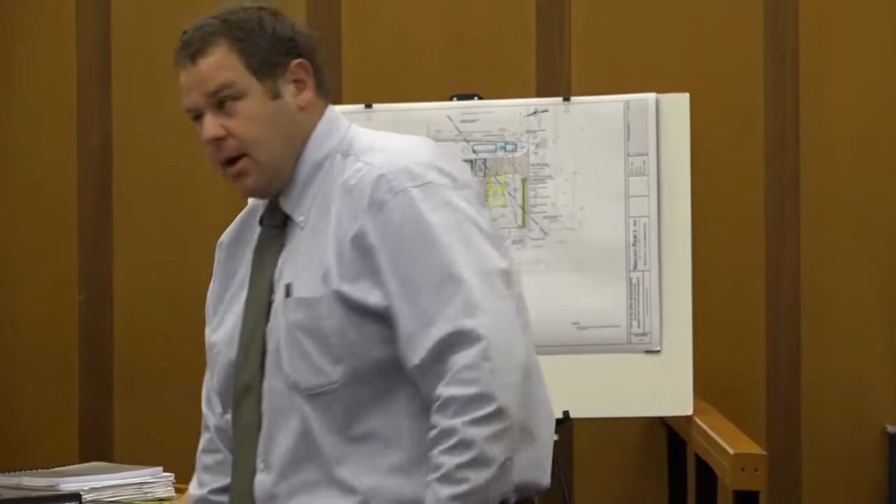That's over here on the board. If you'll see, currently we have where these black spots are - this is the above ground, this is the below ground pit. These were constructed in the 1960s, well overdue for replacement. We'll be moving forward with replacement of this station.

We'll be doing a 14 by 32 above ground building that will house our generator, all of our electrical controls for the new pump station, as well as a bathroom as required by code. We'll also have a large underground wet well pit that will house our grinder pumps, a shallower valve vault which will be used for our check valves, and then a smaller metering pit.

So this station takes a fair majority of the south end of the city, the whole Wood Street area next to the cemetery, and then it all feeds down into this area, including the complex.

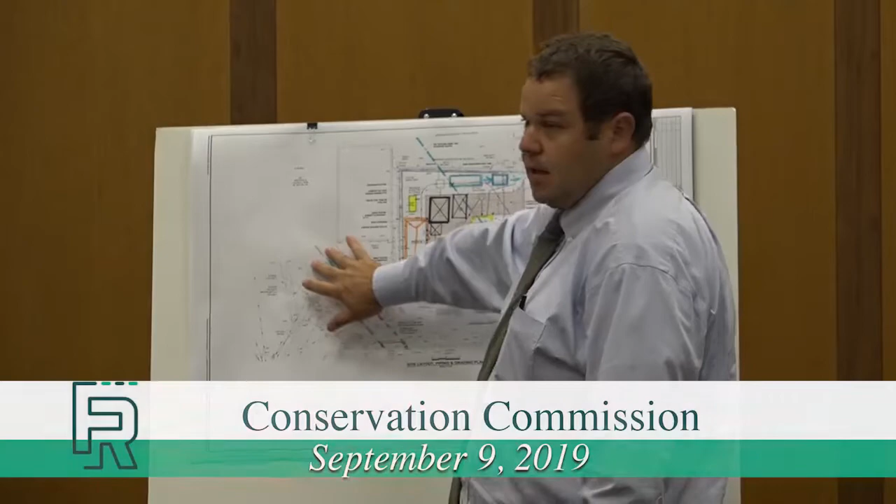Where we run into a problem, and why we're in front of the Conservation Commission - right over here we have Sucker Brook. Sucker Brook feeds from Stafford Pond into the South Watuppa Pond. We're within the riverfront and the bank of Sucker Brook. Our property doesn't directly abut Sucker Brook where the pump station is, but it is within the buffer zone.

Just as a layout, this will be the area of the new building that's going in place. This will be the wet well area. This is the valve vault.

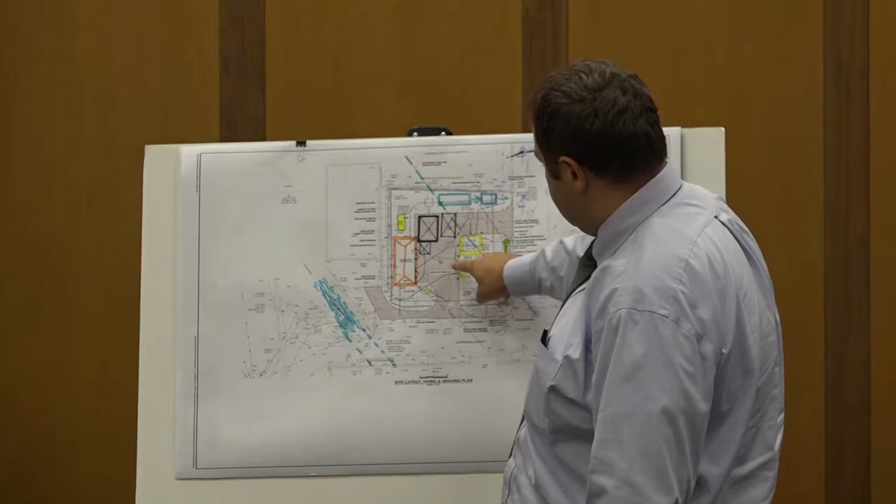The sewer currently comes in down this area and goes into the well here. It'll be diverted into this new wet well. We have a force main that comes out of the pump station and goes and ties in up next to Jefferson Street after it passes over Route 24.

Through the whole project, we'll have standard erosion control in place for any erosion from our site, and any dewatering, which it is expected that we'll have to do on the site. Ledge is 12 to 15 feet below grade based on the borings we've done on site so far, so we'll have to dewater to get down to that point.

What dewater means: once we dig a hole, if we just left that hole, it would fill up with water. We have to put pumps in there to be able to pump it out.

Through the project, we're putting in the bid that the contractor will have a frac tank on site. That's a large tank that allows any of the heavier solids or rocks that get pumped out to settle, then into a stilling basin and filter before it is discharged onto the street, heading towards South Watuppa Pond, through a water quality swale constructed by the water department two years ago, and then into Sucker Brook and the South Watuppa.

For the final restoration of the site, we are planning a water quality swale towards the south end of the site, so we're not planning with our grading to shed any water directly into Sucker Brook, which is to the north. We're planning on grading it so it goes to the south towards the roadway.

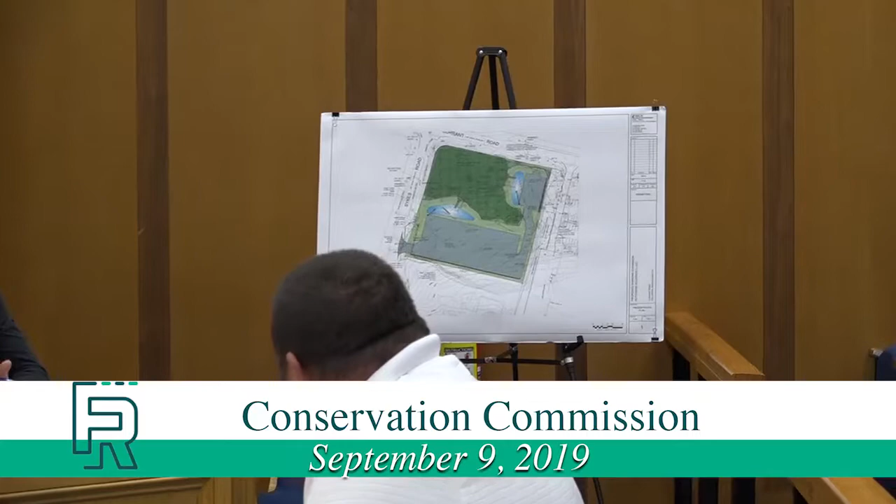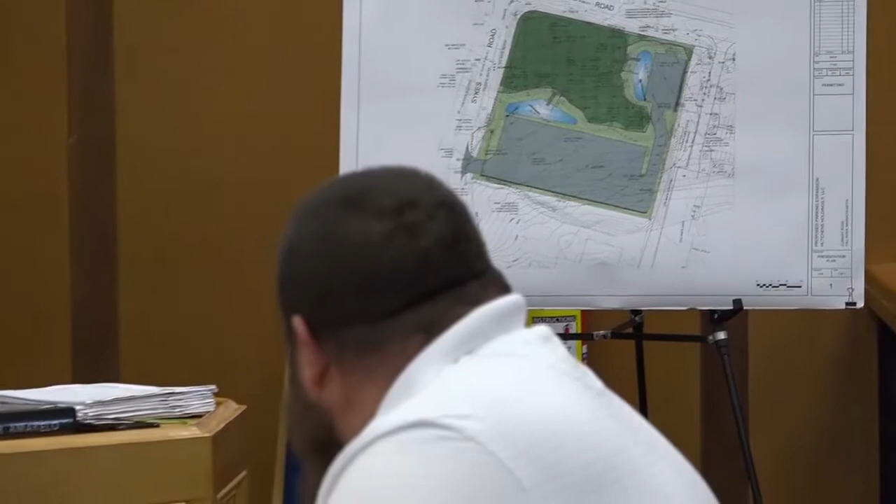The purpose of the proposed parking area is truck parking and overflow vehicular parking. Right now, a lot of the trucks going to the Ice Cube facility are queuing along Corrant Road, and they're trying to provide a parking lot for them to queue in, alleviating some of that on the road. The parking area will flow...

I'll go over to the board. The parking area will flow to one of two detention areas that serve as infiltration basins through a double sump catch basin and a sediment forebay prior to overtopping to this wetland area, which discharges into the existing drainage system servicing the industrial park.

A good portion of the water that creates this wetland impoundment area is coming from the roofs of the adjacent building that runs across the lot. We're proposing to intercept that with a crushed stone edge drain through a piping system to a swale around our...

proposed parking. We have erosion controls shown on the site at the limits of work. We've been able to eliminate any proposed work within the wetland. In an earlier version, we were doing some wetland filling, but the plan before you has no wetland fill required. We do have a small section of retaining wall here, only about a couple feet high in this area, to keep all the work outside the wetland.

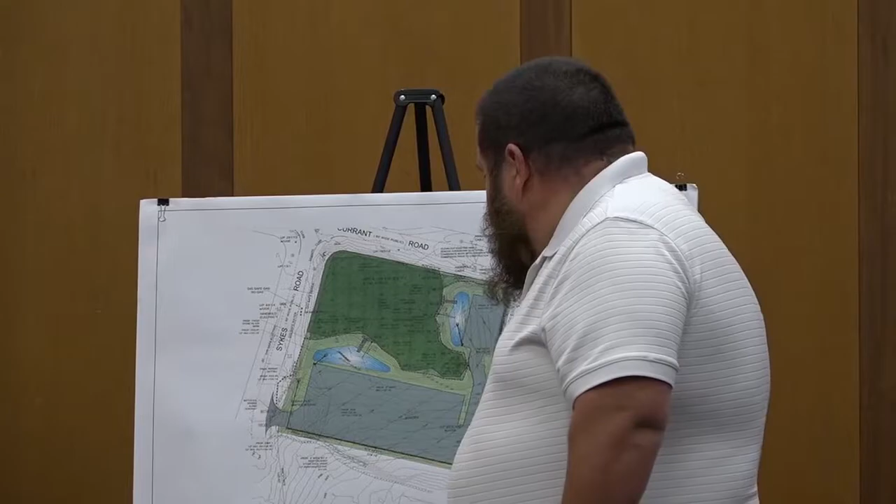We did submit site plan review for site plan approval with the planning department. I don't believe there were any major concerns or comments on that through discussions with Mr. Roth today, and we're looking for an order of conditions on the project this evening. We do have a DEP file number with no comments as well.

Engineering and the site plan review committee have reviewed it; engineering, community utilities, and planning are all fine with the proposal, and it meets DEP standards. So we're recommending approval with the standard erosion control conditions, that erosion control be installed prior to and during construction. With that, we're recommending approval with this standard condition, and the site plan review will be approved shortly after conservation is approved.

Can I have a motion for approval with standard erosion control before and during work, and standard order of conditions? So move. I'll second that. Can I have a vote? Aye. Aye. Vote passes. Thank you.

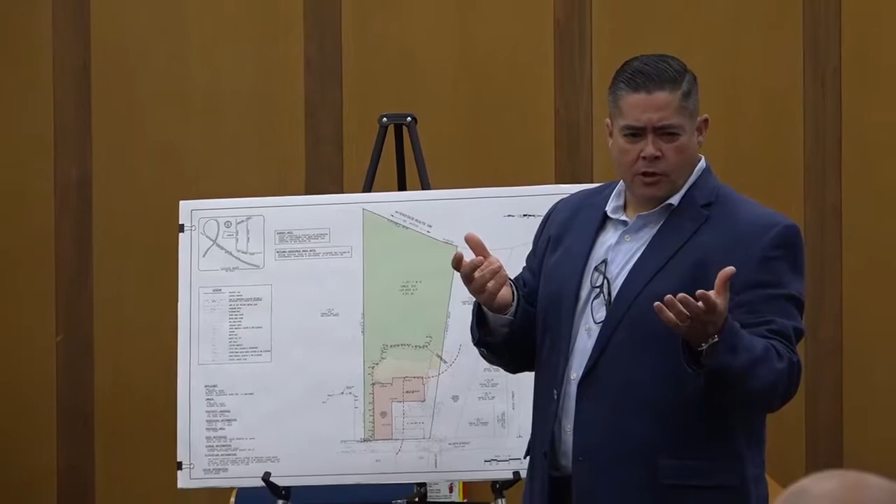So in the process of working in this area, they came across this building and would like to do a similar project here as well. So any of the incidentals with regards to the building, although not germane to the Wetlands Protection Act, I think Jeff can answer anything about the specific project itself.

As you see on the plan before you, shaded in this dark green area to the rear is a bordering vegetated wetland that actually comes all the way up to Alden. This red line would be a bordering vegetated wetland line that we have established in the field, basically almost comes right up to the building on this southerly end of the building.

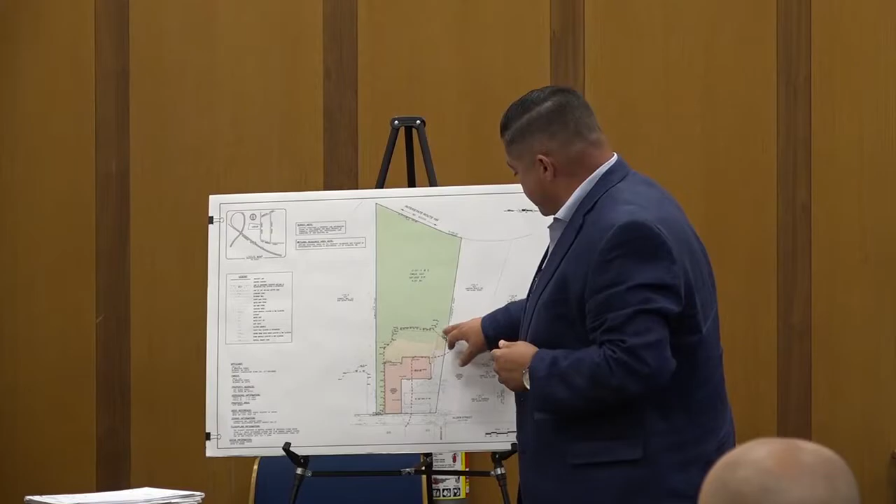The back of the building is a cleared area. There is a fence currently installed basically right at the wetland edge. It was used for commercial activity, trucks loading, and it's not a paved area by any means, but it's a gravelled area that they clearly use for commercial purposes.

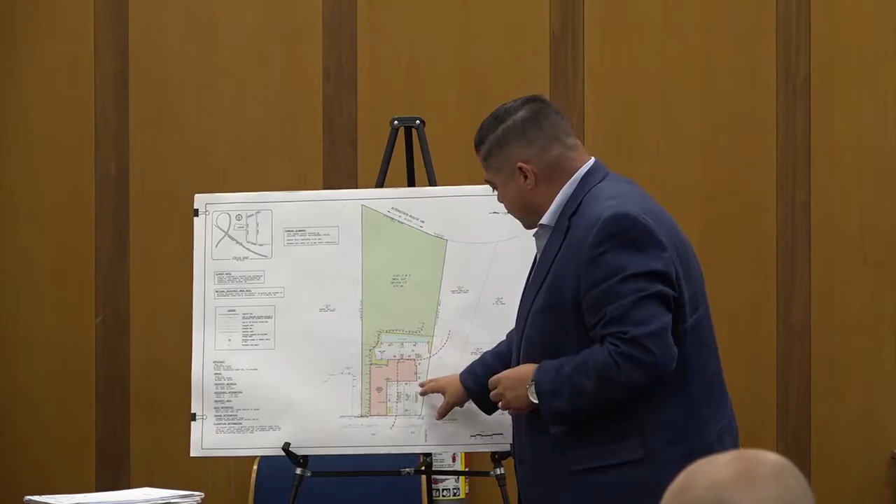So what we're here today for is the proposed work within the 100-foot buffer zone to that bordering vegetated wetland. We would be adding a couple landscape islands to the front of the building, restriping that parking facility, and then extending the parking facility to the rear of this building, creating this rear parking lot, and then installing and constructing this rather large rain garden, which is a stormwater management tool that we use.

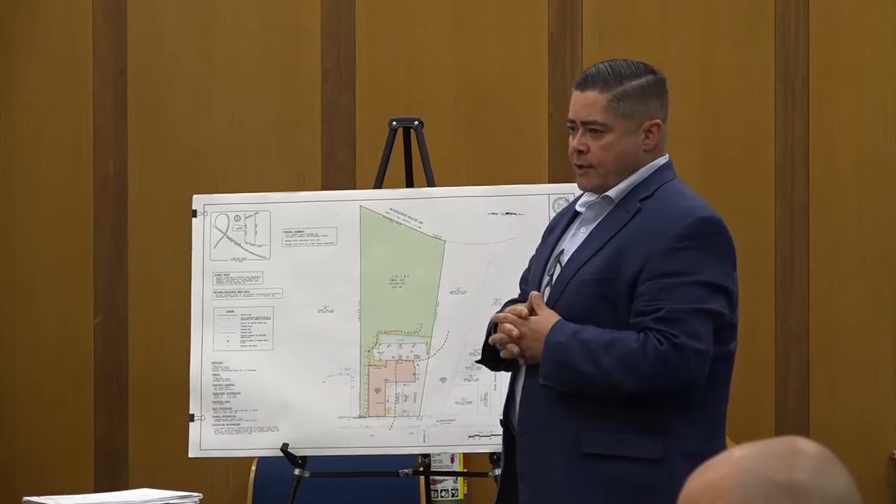It's a low-impact development tool where you have a couple of feet of this very well-defined processed material. It's in lieu of installing just an open detention pond. You get a little bit better water quality out of it, and it helps us meet a lot of the drainage requirements that we need for doing work within 100 feet to a wetland. And we'll be installing some additional green space around that parking area as well.

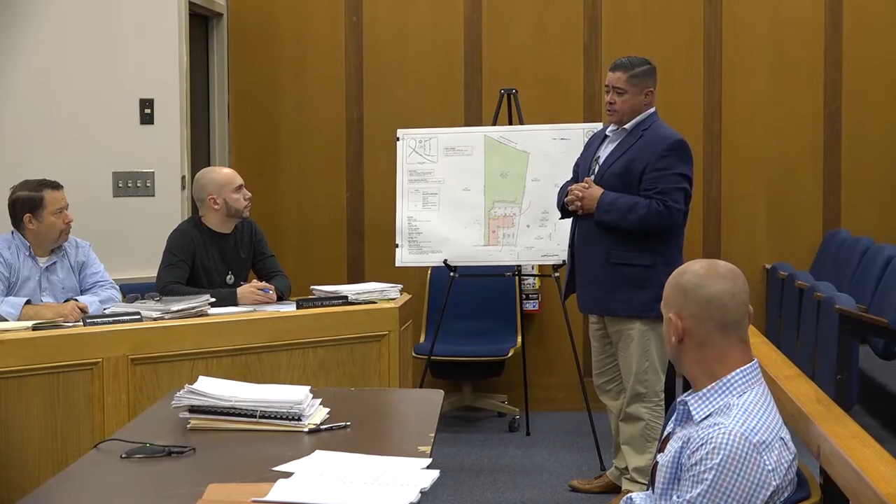We do have to go through the site plan review process, which we understand. But that's basically it. We have submitted detailed calculations with regards to stormwater runoff, showing that we've reduced the amount of runoff making its way to that bordering vegetated wetland. There's a detailed operation and maintenance plan, everything that we would need drainage calculation-wise to support the project. If you have any specific questions, it's rather straightforward, but myself or Jeff would be glad to answer anything.

Well, I didn't know if any of the members had any questions.

The city staff, myself, and the city engineer have met with the applicant and sat down and looked at it. We think that this is environmentally a big improvement on the big gravel and parking area with the chain link fence all the way up, and renovating a vacant mill would be an attractive project and an environmental benefit. We're recommending approval, subject to erosion control to be installed prior and during construction, and site plan review for the detailed engineering. So those would be the two conditions.

Can I have a motion for approval with the two conditions: erosion control before and during construction, and a site plan for detail? I'll make that motion. I'll second that motion. Vote. Aye. Motion passes. Thank you very much.

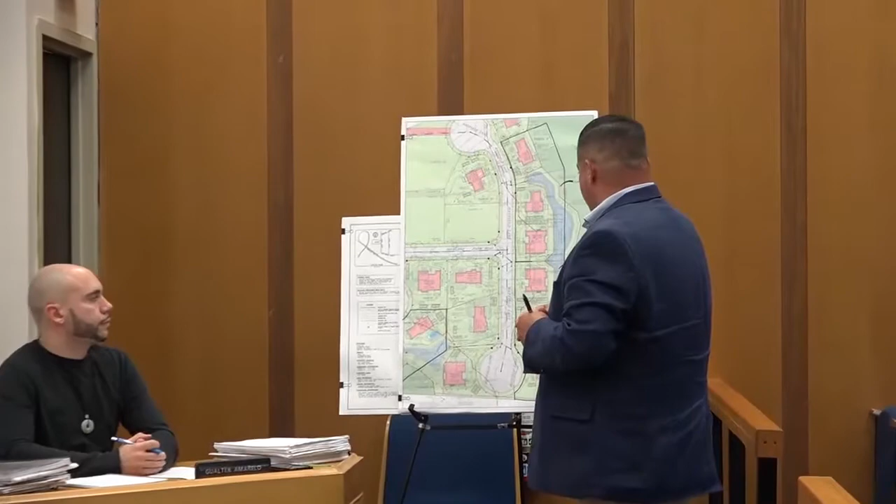For the record, Dan Aguirre of SciTech Engineering, here this evening on behalf of Highland Farms Development for the single-family home construction in what is the Highland Farm subdivision. You've seen a number of these lots before you. Because we were getting towards the end of the building season, the applicant asked us to put together a bunch of them to get them out of the way rather than piecemealing them as we go along.

I'm going to start with the furthest north lot, parcel 21, which is 101 Hayfield Lane. We're looking at this entire stretch of homes, 1, 2, 3, 4, these 6. Starting to the very far east, we have a bordering vegetated wetland limit shaded in darker green. This exterior dashed red line is the approved limit of work under the previous order of conditions for the subdivision itself, which allowed these lots to be filled in their rough condition and the construction of this stormwater management system. That's all been permitted and constructed to date, so everything you see today is up gradient from that work.

So what we have proposed is a single-family home on each one of these lots at the minimum setback possible to the street, so we're as far away from the wetland as possible. We've proposed walkout basements or partial walkout basements in the rear of every home to minimize the amount of fill in the 100-foot buffer zone. Roof drain drywell systems have been proposed on each of the lots, which will go through site plan review in accordance with the subdivision approval, so all roof runoff is collected and discharged into the ground.

Where you see this new red line in the front, that's new erosion control barrier we're proposing to keep the constructed pond in good condition, so silt off these construction sites won't wash into the newly constructed pond, which now has some grass growth and is functioning well. So we have this wetland being protected by the original erosion control fence, and we'll now have this new erosion control fence in place to protect the pond itself. These are all fairly generic, almost entirely within the 100-foot buffer zone.

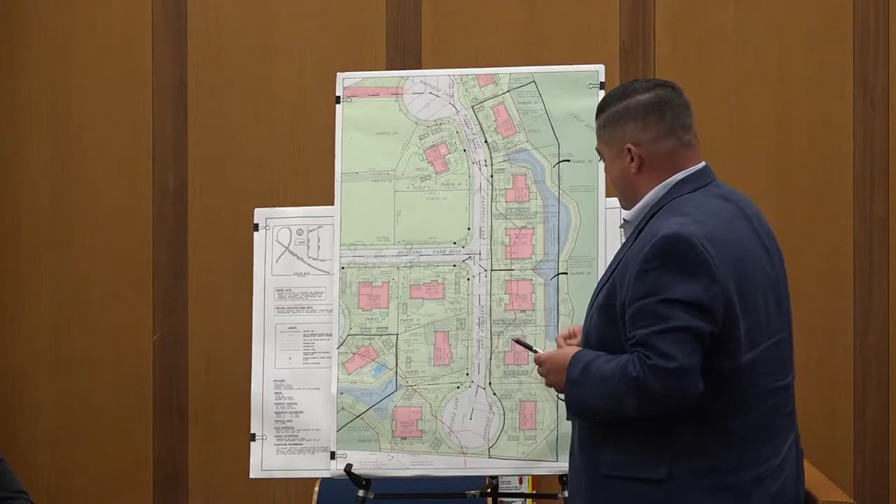As we continue westerly in the subdivision, there's a cul-de-sac known as Old Pasture Way. Parcel 11, number 7 Old Pasture Way, you'll see again the bordering vegetated wetland closest to us here. We have this detention pond constructed previously, and the home we're proposing is up gradient of that, with new erosion control being proposed as well, and roof drain drywells for that house. Continuing further west, we're going to go right from this lot to the very next lot.

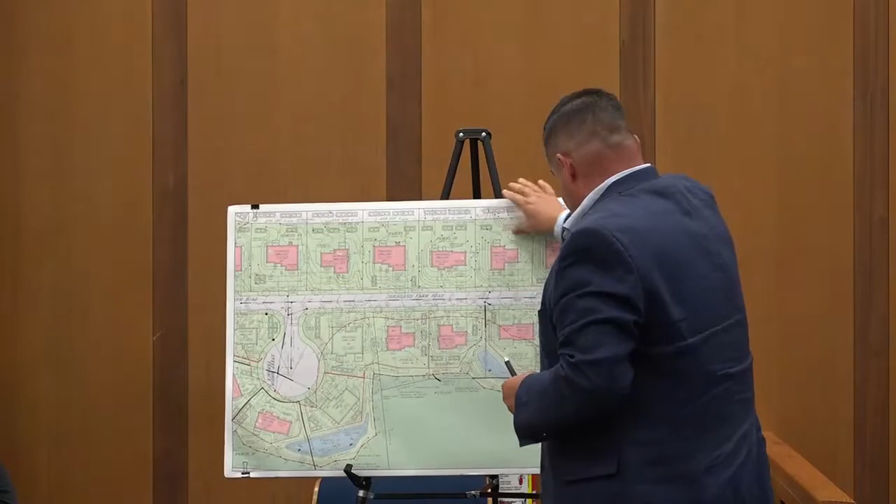What's the, so we were here just now. Excuse me, I'm having trouble with the noise. Oh, it's the HVAC system. Can you bring it closer? I could hear it, it was just irritating, I didn't know what it was. Well, we don't have an audience to worry about, so we can get a little bit closer.

I'm doing fine. So we were just on this house here. This is that cul-de-sac known as Old Pasture Way.

Similarly to the last one, we have a bordering vegetated wetland system shown in dark green, a constructed detention pond that was part of the original subdivision, and a new hay bale and silt fence line located here. The proposed dwelling is again as close to the street as possible, with roof drain dry wells located here and here as well.

And then moving further west, we get to the end of this little cul-de-sac called Steeplechase Terrace, Steep Brook Terrace. Same thing: bordering vegetated wetland, previously approved limit of work, a drainage swale that's been constructed, a detention pond that's already been constructed here, and the proposed home is up gradient from that with roof drain dry wells as well. So they're all identical, working within limits of already approved areas that were altered as part of the subdivision construction. If you guys take another quick look at it, by all means do.

So in most cases, we have a detention pond recently constructed behind these proposed homes. This back location, this is an actual swale, so there's no ponding of water, but that's to be constructed that way. Going over it again, only one doesn't have a pond - well, two. This outside one has a small one here, but this lot has no pond at all. The rest of them basically all have ponds behind.